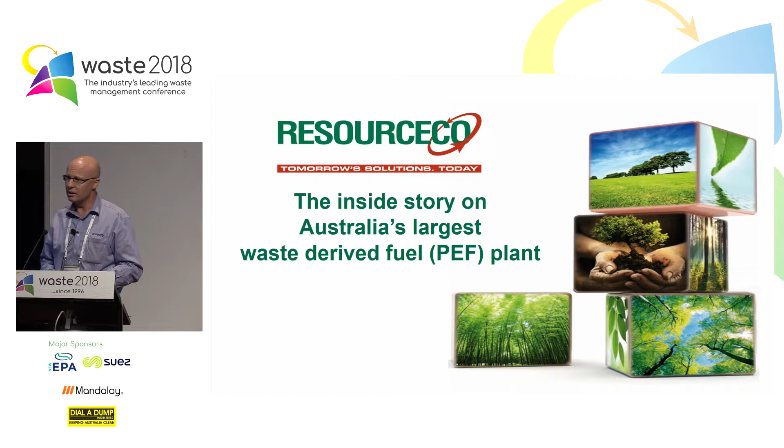But look, what I wanted to do today was just share with you a facility that we're currently commissioning in Wetherill Park in Sydney. And that's our new resource recovery facility, which incorporates the production of processed engineered fuel. Processed engineered fuel, which I'll talk about in a slide or two, is simply a high quality RDF, or the more common technical term is solid recovered fuel, SRF. And as I said, we're just switching it on, and we're looking forward to seeing it up and running over the coming months.

So just firstly, for those who've never heard of ResourceCo before, just a 1 minute overview. We're a privately owned Australian company. We've got about 500 employees. We operate in every state of Australia, and we also have a growing Southeast Asian business as well, with about 50 people in the region. We focus on Malaysia, Philippines and Singapore.

The sustainable energy business, which is part of ResourceCo and has a lot of focus for us at the moment, focuses on manufacturing fuel out of generally non-MSW waste streams. The fuel we make is SRF and TDF. We currently manufacture over 300,000 tonnes of that. About 100,000 tonnes is used within Australia, and we export about 200,000 tonnes offshore, and we have done for over 5 years now without issue. The goal is to grow our fuels business.

There's a fantastic opportunity in Australia, in a lot of states where, as Mark's pointed out, landfills are filling up, levies are going up, and communities expect us as an industry to do more with waste rather than put it in a landfill. And I'm not disparaging landfills. They perform an absolutely vital service to the community. There are other alternatives as well.

So PEF absolutely sits below recycling and above landfill. All we do is compete with landfills for those waste streams that have an energy content that can be turned into a fuel with a decent calorific value and various technical specifications that meet cement kiln criteria. As was rightly pointed out in the previous session by Mike Ritchie, we cannot compete with recycling. Not only does that not fit with the waste hierarchy, that's not the desire of any government anywhere. On top of all of that, we physically cannot economically compete with recycling.

Recyclers typically produce a commodity that has some significant value. Now, I know there are what we hope are going to be shorter-term challenges with China Sword at the moment, but they produce commodities with significant value. The fuel commodity we produce has to compete with coal, and as a result, it is low value. So we have to have a higher gate fee to offset a lower value product out the end, which makes us uneconomic to compete with recyclers, even if we did have a desire to.

What we can do, though, is provide a fantastic non-landfill solution to residuals out of recycling, and for those waste streams that can't go through a recycling process for whatever reason.

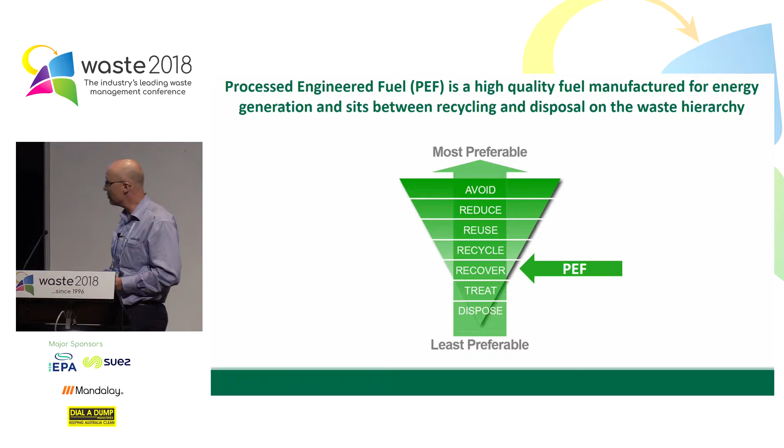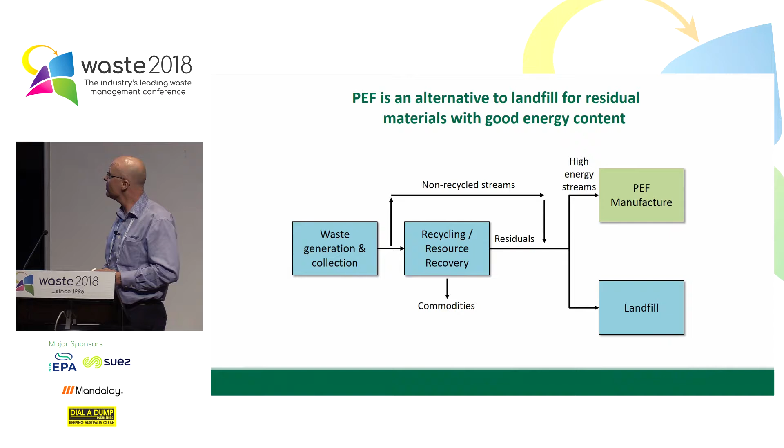So I've put this slide up a few times at other places, but again, it's useful, I think, to understand exactly where we fit in the waste supply chain. So, from your left to right, waste is generated and collected. Hopefully it will go through some sort of recycling process where commodities of value are extracted out of it. Some streams don't. Non-recyclable residuals then have an option to go to landfill, and if they're a high energy content stream, there's an option to have fuel manufactured out of them.

And then just very quickly again, it's a pretty simple process. SRF is high energy content waste materials, typically dry, so non-recyclable plastics, timber, so engineered timber, treated timbers, painted, etc. So non-clean timber, textiles, dirty paper and cardboard, stuff that is going to go to landfill, we like.

And then the processing is just mechanical shredding, sorting, with also air separation to end up with a final fuel on the right, which is typically a piece size of less than 50 millimetres, sometimes less than 35 millimetres, maximum size dependent upon the cement kiln requirement. And it looks like chopped up lolly wrappers effectively with a high plastic content.

And the point down the bottom is cement kilns. A cement kiln nowadays costs $500 million. They're a very big piece of kit. They are a continuous process operation, and if you supply a fuel or a raw material that upsets the process of a cement kiln and causes it to stop, that is an incredibly expensive mistake.

So cement kilns rightly have very strict specifications around their fuel. And it's all about, we're a manufacturing process, we manufacture fuel, we don't grind rubbish, and that's a very key mindset to have in this business.

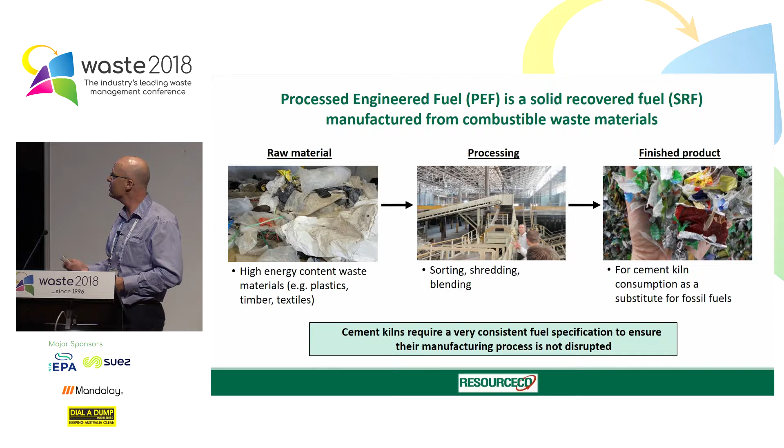Okay, so getting on to our Wetherill Park plant, and that's a little hard to see, but again, come to our stall and we can show you it in all its glory close up. Basically, we've got a facility there that I'll go right across. It's licensed to take 250,000 tonnes per annum of waste in. We will slowly ramp that facility up. We don't have plans to get to that volume anytime soon, but in our licensing process we applied for that for future expansion opportunities if they arise.

So as I said, it's mechanical and pneumatic separation. We get more than 90% recovery of the waste into the plant into usable commodities, including our fuel. And the waste that we bring in is dry, non-recyclable waste streams, non-putrescible, high CV is what we're targeting. So it's a $30 million investment for our company. That's a big investment. It's a 2.1 hectare site, and we've got 9,000 square metres under roof. That is an actual picture of the site as it will look within a month or so.

We have struck a long-term offtake contract with Boral, who operate a cement kiln in Berrima, so it's about an hour and a half south of Sydney. They're our foundation offtaker. We will be manufacturing PEF to export into our network of cement kiln customers in Southeast Asia as well. The Clean Energy Finance Corporation has given us the loan facilities for this project, and we also were given a grant by the New South Wales EPA, which was greatly appreciated as part of the process.

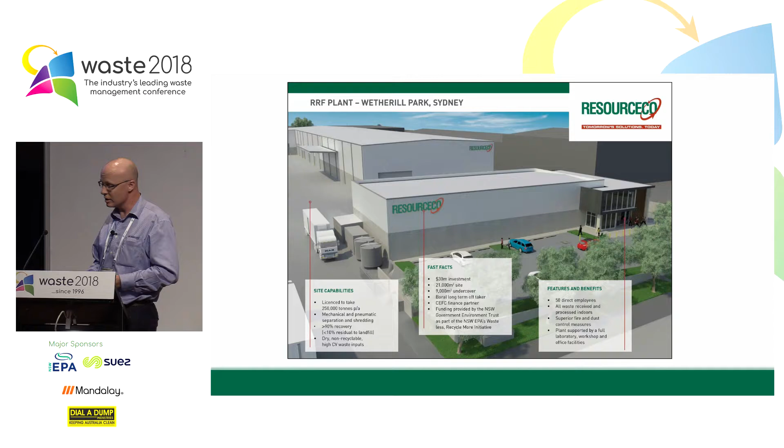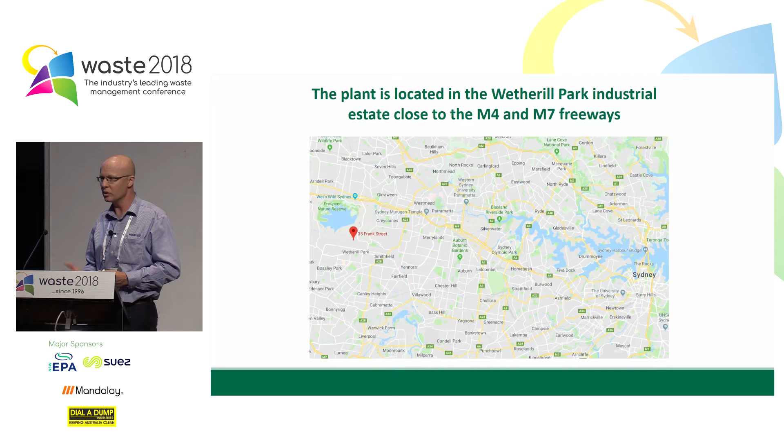Now this is a little hard to see, but for those who aren't familiar with Sydney, that's us. There we go. So basically that yellow highway to the north, the M4, and the M7's just to the west of that Prospect Reservoir. We'd spent a lot of time finding the right site, because for us, we want to be a high service operation. We've got a fully concreted site, focused on very quick turnaround for waste collection customers. They can tip undercover, so all weather tipping, and the shorter we can make their disposal time, the more time they've got to pick up bins, which is where they make their money.

So we're licensed to accept, as I said, dry, non-putrescible waste streams, which does include residuals from recycling facilities. So this is where we can really add some value to the industry, particularly those complicated, light residuals that have been hard to do anything with other than send to landfill in the past. We certainly love that type of material and can turn that into a high quality fuel. C&I waste streams, so long as they meet the licence criteria.

Difficult mixed C&D waste streams, lightweight mixed C&D waste streams where there's not a lot of concrete. We can't compete with heavy C&D recyclers, but certainly those C&D loads where there is a lot of lightweight material and not much heavyweight. And an interesting one for councils is council curbside waste is an opportunity to put through this facility as well.

The final point here, and I think people who have gone through the New South Wales Energy from Waste policy, it is quite an onerous policy, particularly around resource recovery, and this facility is governed by that policy. So the design right from the inception of the idea was about trying to make sure that we can partner with our waste customers and ensure that we always comply with that energy from waste policy, and in particular the resource recovery criteria.

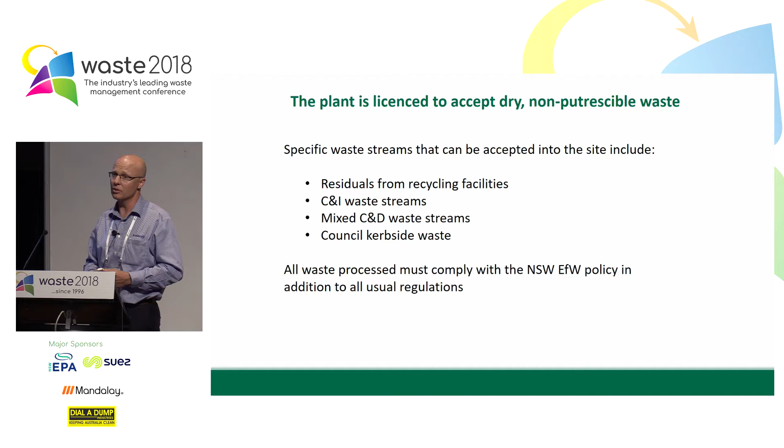The larger than 50mm goes through one stream, air separation, some other screens, and a set of ballistic separators, basically to end up with a high CV, high calorific value PEF, which we export. The other material will go through a secondary line to make a lower calorific value PEF, which is what Boral have asked for. And then at the end, that's where it comes out, the high CV PEF that we export. We bale into 1 tonne bales, we wrap in air and water tight wrapping and export out through 40-foot containers.

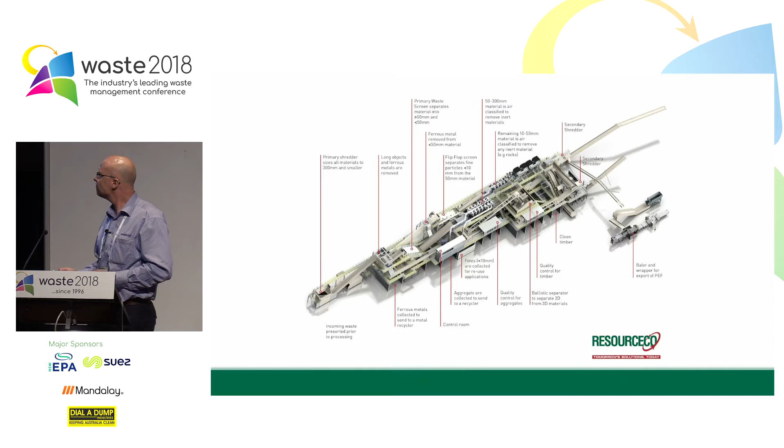So the approval process, it was shorter than the Veolia experience, and that's really because we don't deal with MSW. So it's dry, non-putrescible, C&I, residuals from recycling facilities, etc. So really for us, we decided in early calendar year 2015 that there was a really good business opportunity to put one of these into the Sydney marketplace.

We triggered the state significant development process given the volume of the site. We launched that in September 2015. We got the response from planning in October. We submitted our EIS in March of 2016. That bubble should probably be red in colour. There was a hell of a lot of to and fro, that's for sure. All good value-added stuff. And then April 2017, we got the consent and the building and infrastructure started, and the plant started to be put in December. And as I said, we're just starting to dry commission at the moment.

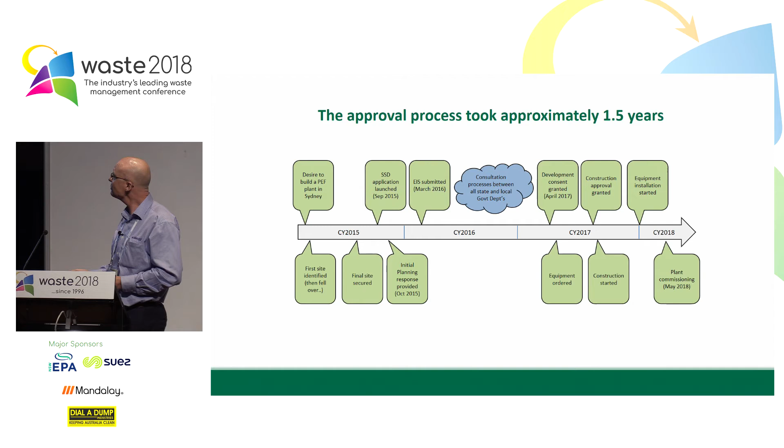So there's 2 more slides only. Look, the one thing that was really helpful, to be honest, in actually getting the approval was we could point to a similar facility working in Adelaide now for about 10 years, supplying about 100,000 tonnes of fuel to Adelaide Brighton cement kiln. So it wasn't new technology, and the New South Wales EPA were very interested in what was going on in South Australia, and to their credit, they took the time to put a team on a plane to come down and visit both facilities and meet with the operational teams from both the fuel manufacturing and also the cement kiln. And I think that helped answer a lot of questions and concerns they had.

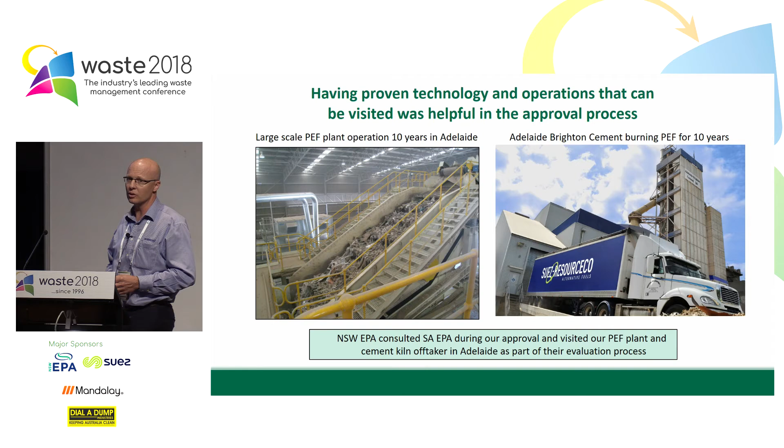And then the final one, just another key learning was working closely with the New South Wales EPA on what is a relatively new concept for Sydney. It's obviously not a new concept elsewhere in Australia, and certainly not a new concept in the rest of the world. There's about 40 million tonnes of SRF traded around the world, is the best estimate. We'll be producing a bit over 100,000 tonnes in Wetherill Park, but working with them in a very close manner was absolutely critical to ensuring they were satisfied that the facility was going to be a value-adding one for New South Wales. So that's it. Any questions?